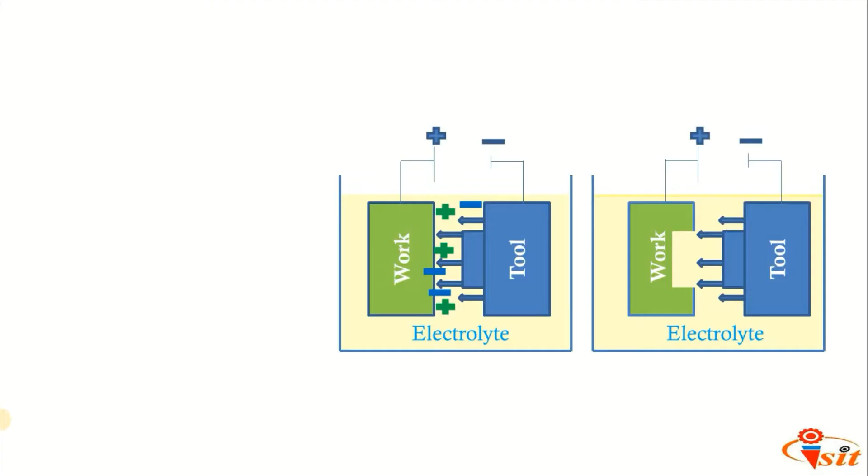Today we are going to see another non-conventional machining process, that is electrochemical machining process. It is a non-traditional machining process used in many industries due to its better advantages. This process is the inverse of electroplating, and it gives a higher surface finish because machining is done atom by atom. So it is called a super finishing machining process.

In today's session, we are going to see its working principle, what are the equipments and what is the working process of this ECM, the different applications and parts manufactured with this ECM process. Then its merits and demerits, advantages and disadvantages of this electrochemical machining process, that we are going to see.

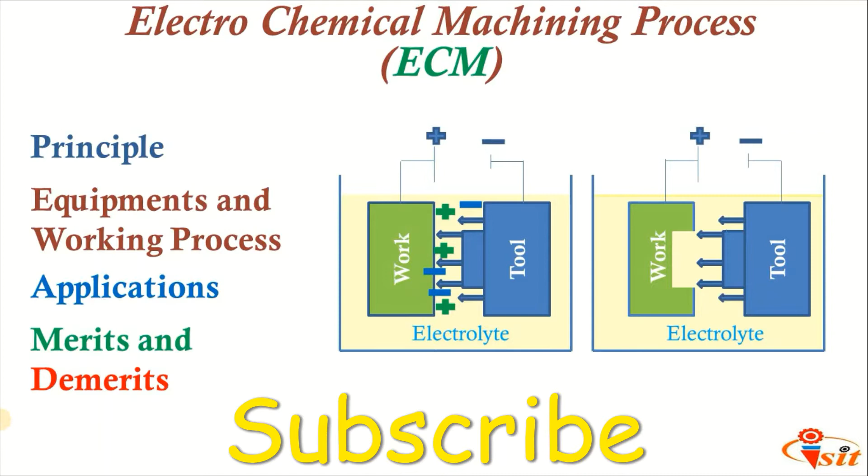By using this picture you can see work can be removed when they are kept in electrolyte. Tool and work are kept in electrolyte. So how this process works, that we are going to see. So first, working principle of ECM. ECM works on the basic principle of Faraday's law of electrolysis. What is that? Weight of substance produced during electrolysis is proportional to current passing, length of time the process is used, and the equivalent weight of material which is deposited.

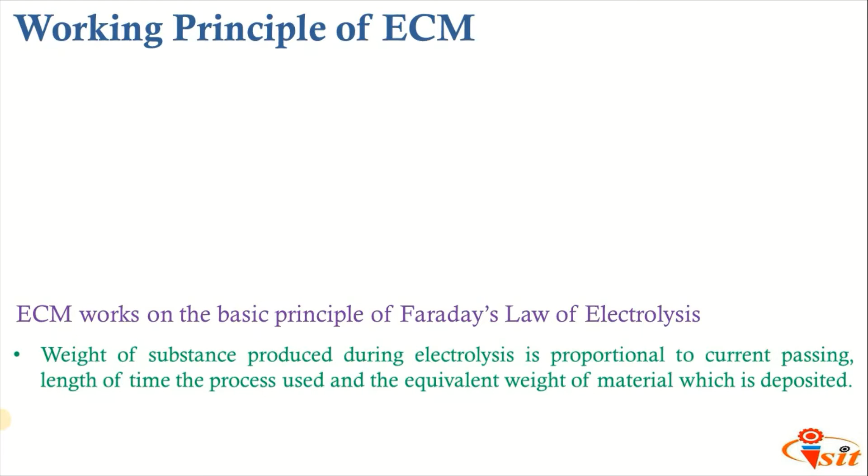So ECM uses the principle of electrolysis to remove metal from the workpiece. ECM is a reverse of electroplating where anode loses metal to cathode. So this is the work and tool. The work is connected to anode, which is the positive terminal, and tool is connected to cathode, that is the negative terminal. So the work loses metal, but before depositing it on the tool, it is carried away by the electrolyte. And this process is carried in the electrolyte. The gap between work and tool is very small.

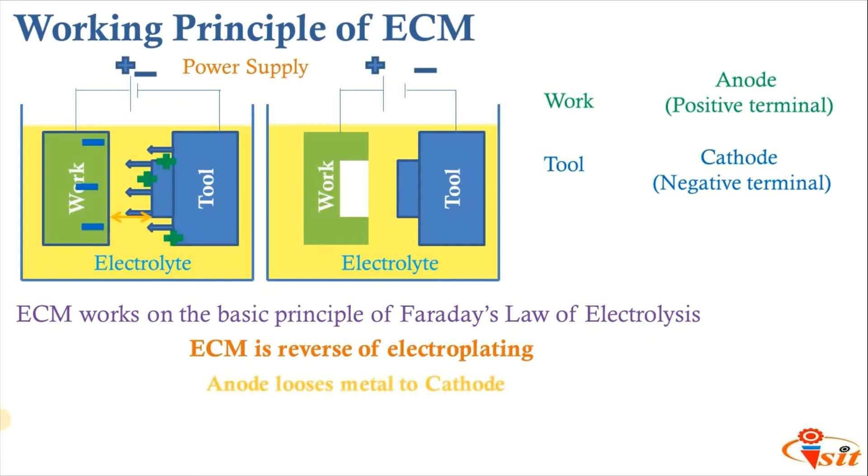If we supply the power, that is potential difference is applied to the work and the tool, ions will be generated. You will get positive ions and negative ions generated at cathode and anode terminal, that is work and tool. These negative ions will get deposited on the work and positive ions will be attracted by the tool, that is cathode. And when this process is completed, where work loses the metal, we get the shape formed as per the tool, means anode loses metal to cathode. So this is the working principle of ECM, that is reverse of electroplating.

Now we are going to see the equipments used in ECM process. So this is the setup of ECM. One by one we are going to see the equipments. First one is a power supply. Here we are providing high value of current, that is 40,000 ampere, and low potential difference, that is 10 to 25 volt. In ECM, the tool is provided with a constant feed motion and electrolyte is pumped at a high pressure through the tool and the small gap between the tool and work. The current is a few thousand, that is 40,000 ampere, and voltage of 10 to 25 volt, and we are getting the gap in the order of 0.2 mm. So first one is a power supply.

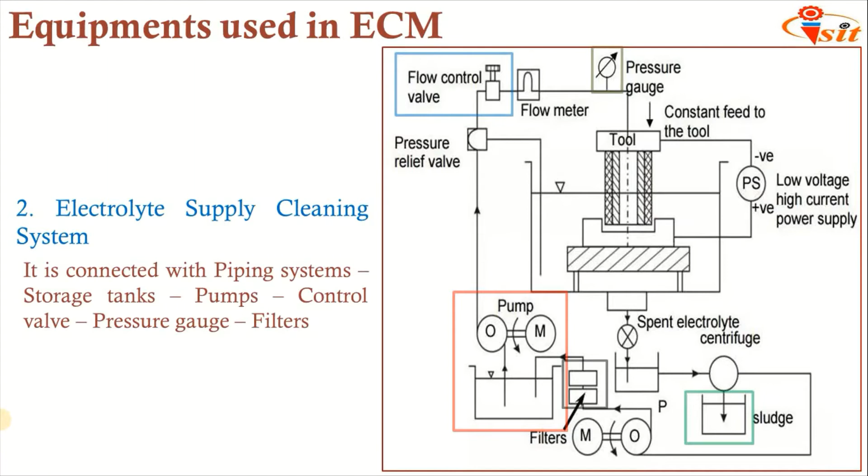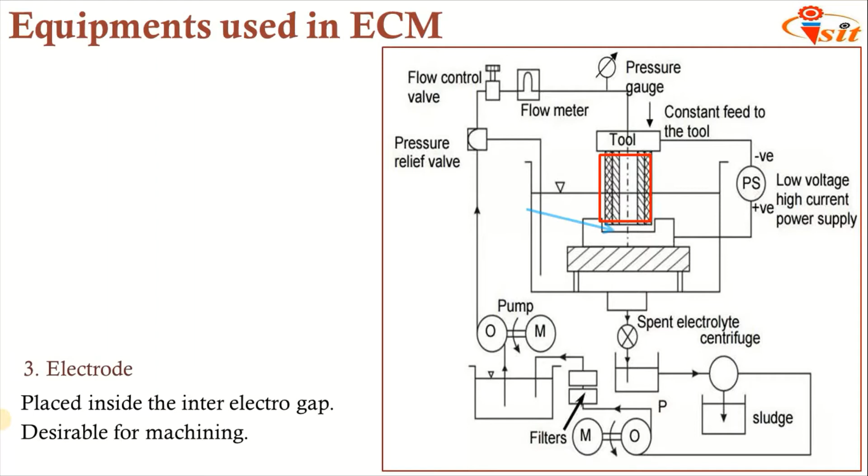Then second, electrolyte supply and cleaning system, which has a piping system, storage tanks, pumps, control valve, pressure gauges and filters. The electrode is placed with an inter-electrode gap desirable for machining, and this gap is as small as 0.2 mm. Because of that we are getting material removal rate up to 1600 mm cube per minute for each 1000 amperes. So approximately 3 kilowatt hour is needed to remove 16 into 10 raised to 3 mm cube of metal, which is 30 times the energy required in conventional machining process. So high specific energy is used in this ECM process.

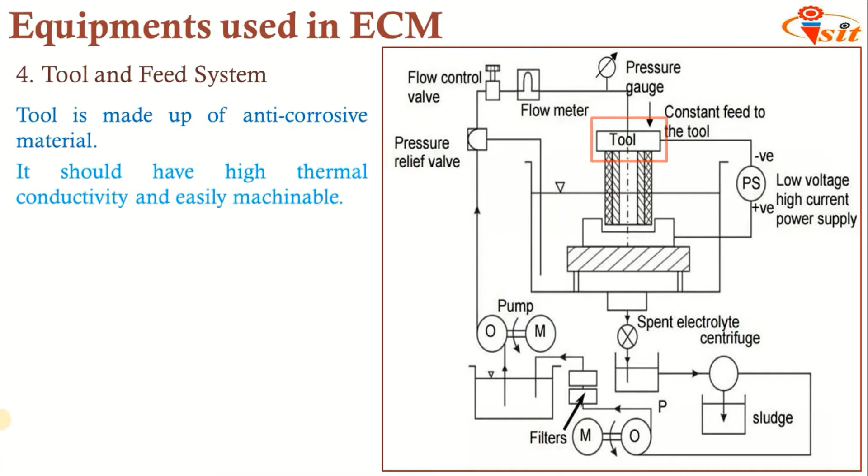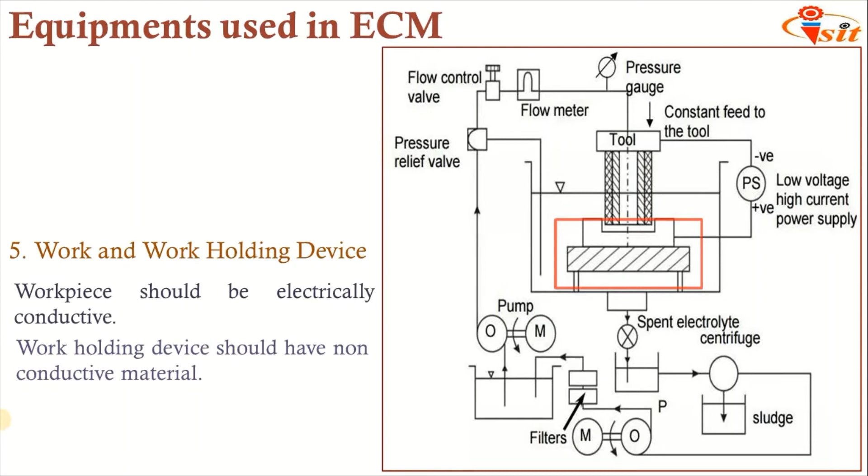Next one is a tool and feed system. Tool is made of anti-corrosive material, it has high thermal conductivity and it can be easily machined. Then work and work holding device. The workpiece should be electrically conductive, and work holding devices should be of non-conductive material. The tool wear is very low and material removal rate is independent of hardness of work. So these are the equipments used in ECM. Next we are going to see the working process.

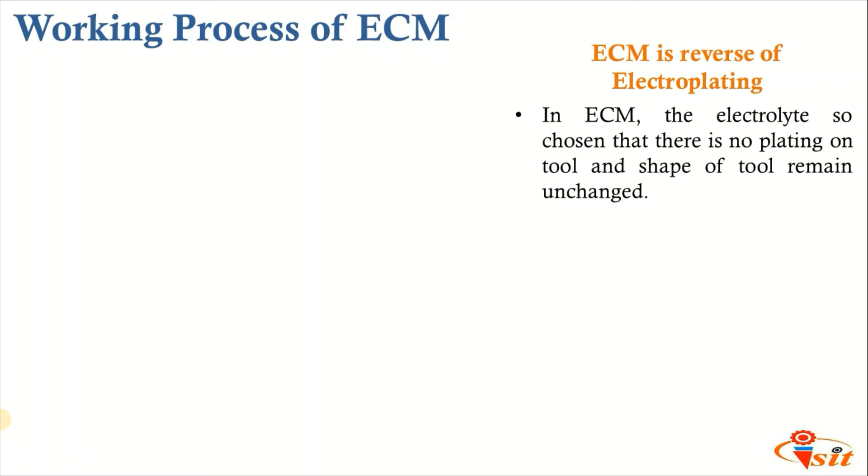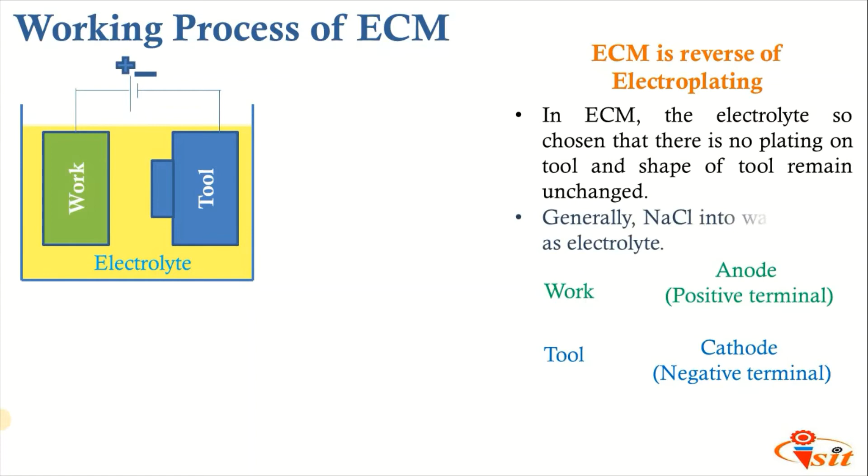ECM works on the principle of reverse of electroplating. In ECM, the electrolyte is so chosen that there is no plating on the tool and the shape of the tool remains unchanged. So the work is connected to the anode, the positive terminal, and the tool is connected to the cathode, the negative terminal, and this tool and work setup, which has a small gap, is kept in an electrolyte; NaCl in water is the type of electrolyte we generally use.

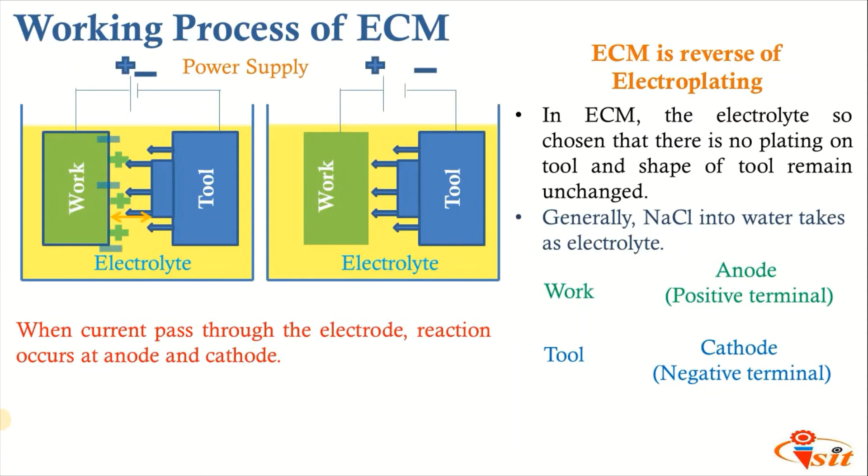If you supply the power, then current passes through the electrode and reactions occur at the anode and cathode. So positive and negative ions will be generated, meaning a potential difference is applied to the work and tool. These positive ions go to the tool and negative ions go to the workpiece. This is based on Faraday's law, and then the work is removed. So how is this process taking place? For that we take one example of machining pure iron through ECM using NaCl plus H2O as electrolyte.

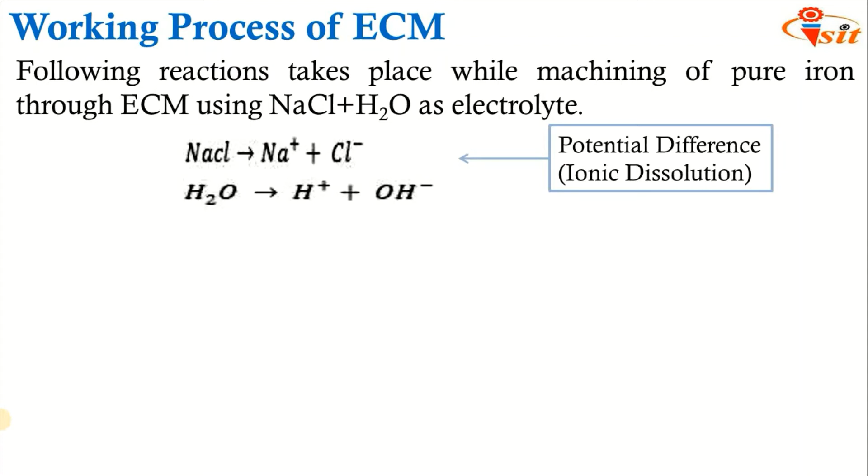As hydrogen ions move towards the tool and reach it, they take electrons from it and convert into gas. This gas goes to the environment. So with the potential difference, ionic dissolution is taking place. NaCl is divided into Na plus and Cl minus, and H2O into H plus and OH minus. 2H plus 2 electrons gives H2, which takes place at the cathode, and Fe plus 2 electrons are generated.

When the hydrogen ions take electrons from the tool, it creates a lack of electrons in the mixture. To compensate, ferrous ions are created at the workpiece, which is the anode, giving an equivalent amount of electrons to the mixture. These ferrous ions react with the opposite chlorine ions or hydroxyl ions and get away in the form of sludge. This gives ferrous ions into the electrolyte and completes the machining process.

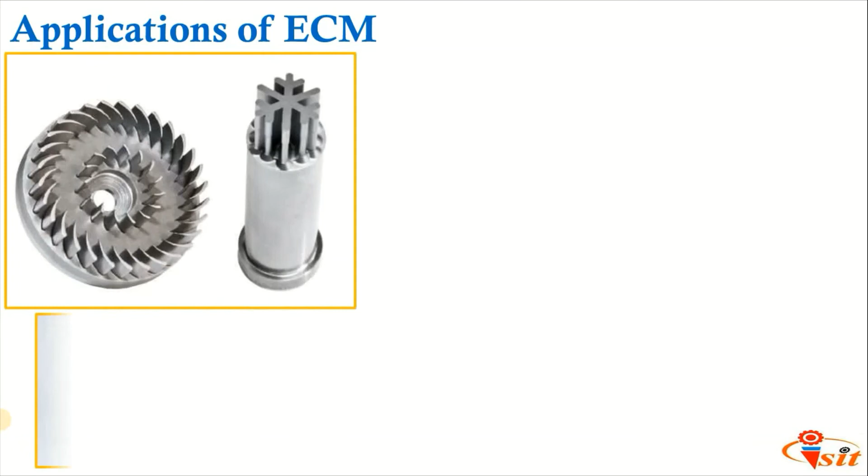Where is this ECM process used? ECM is used for machining discs or turbine rotor blades. It can be used for slotting very thin walled collets. It can be used to generate internal profiles or internal cams, production of satellite rings and connecting rods, machining of gears and long profiles, etc. There we can use this ECM process.

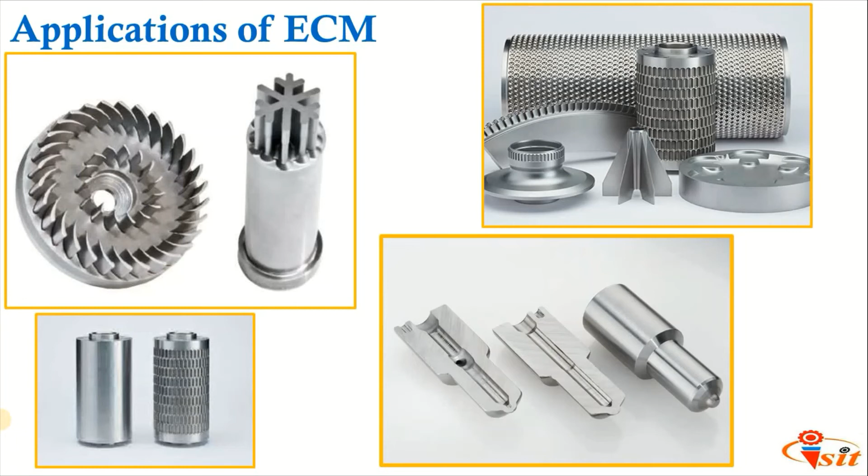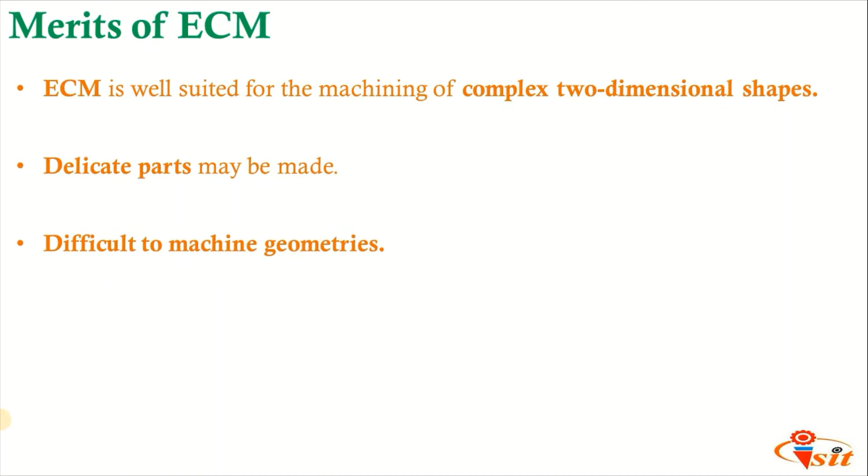Then merits, that is, advantages of ECM. ECM is well suited for machining complex two-dimensional shapes. Delicate parts can be made using ECM. Difficult-to-machine geometries can be done using ECM. Poorly machinable materials may be processed by ECM if proper conditions are applied. Little or no tool wear takes place in ECM. Also, the material removal rate in ECM is independent of the hardness of the work.

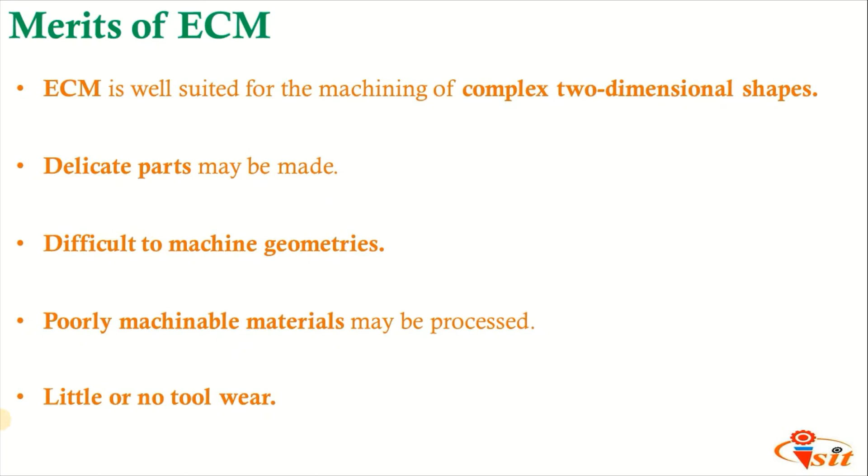Demerits: out of all non-traditional machining processes, ECM requires the highest specific cutting energy. As we have seen, for a material removal rate of 1600 mm³ per minute, 1000 amperes are needed. So approximately 30 kilowatt hours are needed to remove 16 × 10³ mm³ of metal, which is 30 times the energy required in conventional machining. For that reason, ECM requires the highest specific cutting energy.

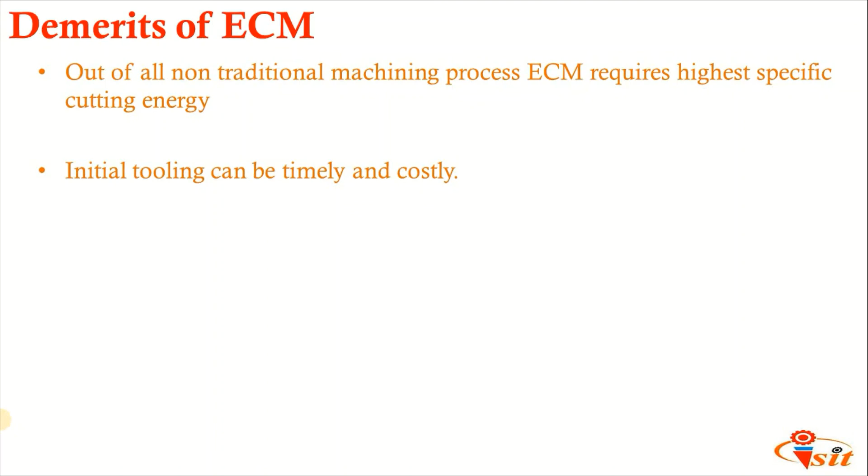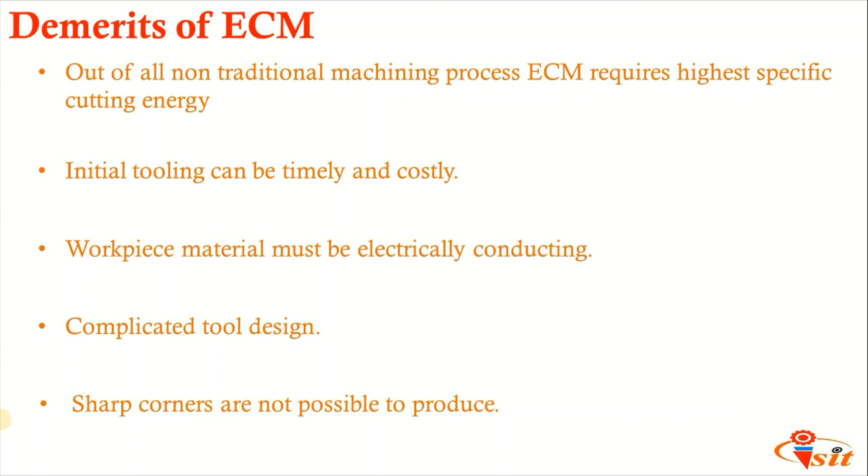Initial tooling can be time-consuming; it takes more time to develop a setup, and it is very costly. The workpiece material must be electrically conductive, so only electrically conductive materials can be machined by ECM. Complicated tool design: based on the shape required, we have to design the tool so that the shape can be generated on the work. Sharp corners are not possible to produce, so we use ECM for producing only contours, not sharp corners.

So in this session, we have seen the ECM process: the working principle, equipment, working process, applications, demerits and merits.